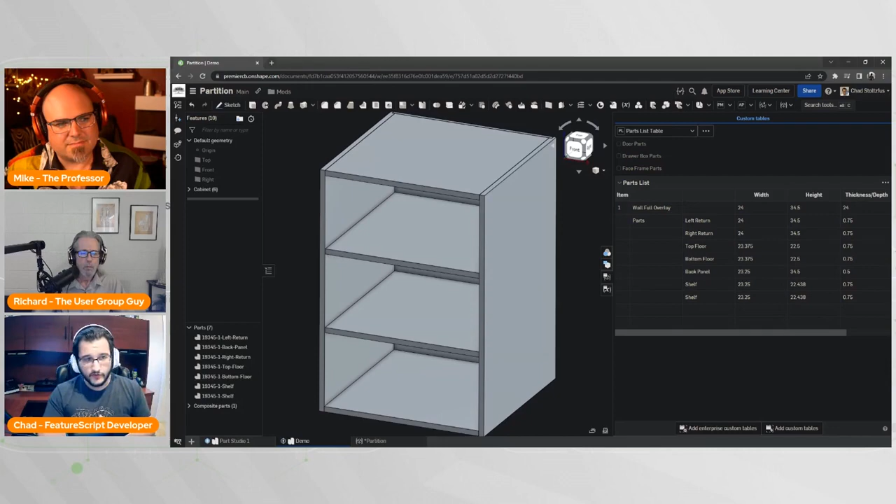So a way that we can demonstrate this is by looking at one of our cabinets. Just a very basic cabinet specification that we have here. But as a cabinet maker, I might look at that and say, hey, I want to put a partition in here. Now, a couple of things you can see we've already done is there's a custom table over on the right side. All of these parts, as you're modeling them, are being measured in real time.

So if I do something like a move face, you can see that the return is changing in thickness as I'm editing it in real time. So that's one of the things that we do. We have this entire system existing in the background, all built with FeatureScript, that is measuring these parts. There's metadata associated with these parts.

If I go in here and I decide that I want to do, let's say, a split, I'll split this part with, let's just say, a mate connector. You can see that it says now there are 2 top floors in this cabinet. Really great. One of the things that does is that eliminates a couple of opportunities for human error, right?

If you have 1 floor and you turn it into 2, well, now I don't have to remember to go back to my paperwork and list another floor. That's just done automatically. So that whole process of quantity, keeping track of what sizes things are, we don't have to type that out manually anymore. That is recorded the moment that you make your model.

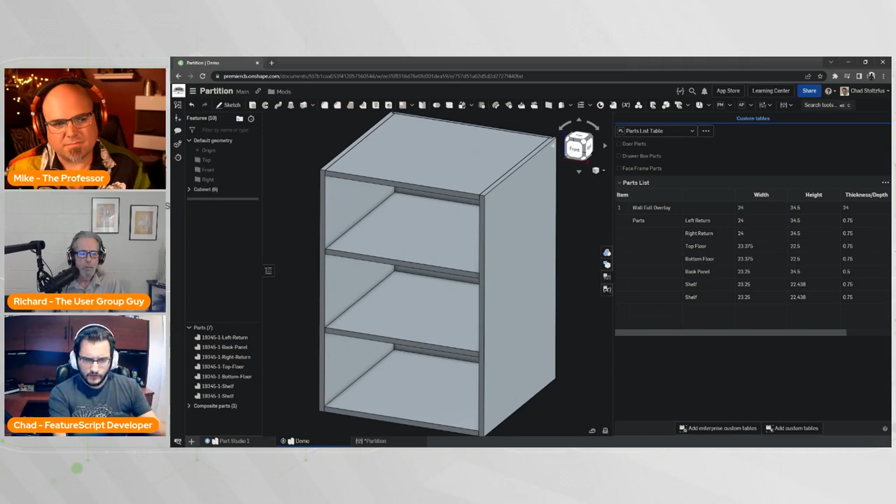Now, when we get into modifying this cabinet, as a cabinet maker, I look at this and I say, I want to put a partition in there. Well, it's as simple as going into the search tools and using the partition custom feature.

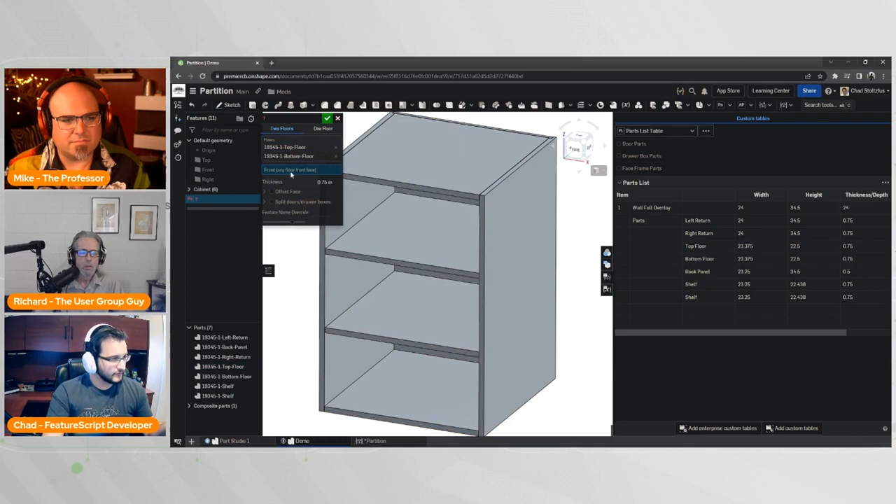And so here we're looking at very familiar terminology for Premier Custom Built, floors, thickness. Do I have 1 floor? Do I have 2 floors? In this case, I have 2 floors. So I can select those 2 floors and select the front of one of those floors. That's going to tell me what to offset the front of my partition from.

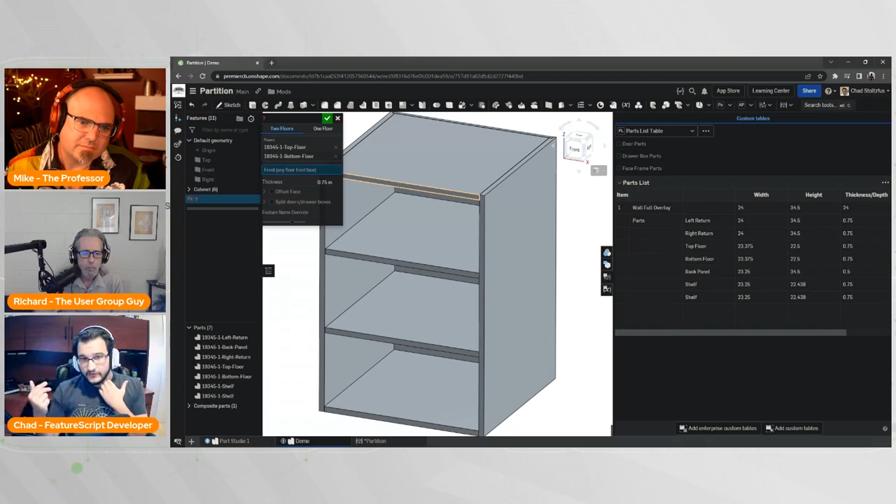But before I do that, as I add in this partition, pay close attention to the custom table on the right side, because what happens when you put a partition in a cabinet is it's going to split those shelves. But not only is it going to split those shelves, it's also going to add an 1/8 of an inch clearance to all of those shelves. And so you can see it adds in the shelves.

I can also go in here, change the thickness. And as I change the thickness of the partition, you can see the shelves are going to change in their height, because we measure the length of the shelves in that direction. It's fine, but you can see that the shelves are changing as I change the thickness of the partition.

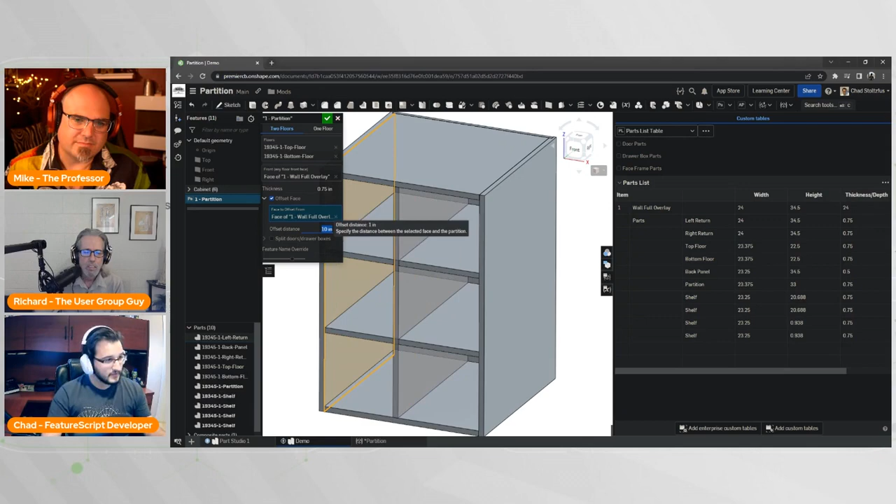If I decide to offset the partition from a particular side of the cabinet, you can see that the shelves' lengths update as the partition moves along. And finally, if I take a look at the partition itself, you can see that it adds that clearance to those shelves. So now what happens is, as I'm modeling a cabinet, I have to remember way less than what I had to remember before.

Because before, in a traditional 3D CAD system, I would have to know to add that 1/8 of an inch in there. But we're able to build the specification of our product directly into the tools that our project managers are using, which I think that's something that you just can't do with any 3D CAD system. I'd be surprised if there's another option out there like that.

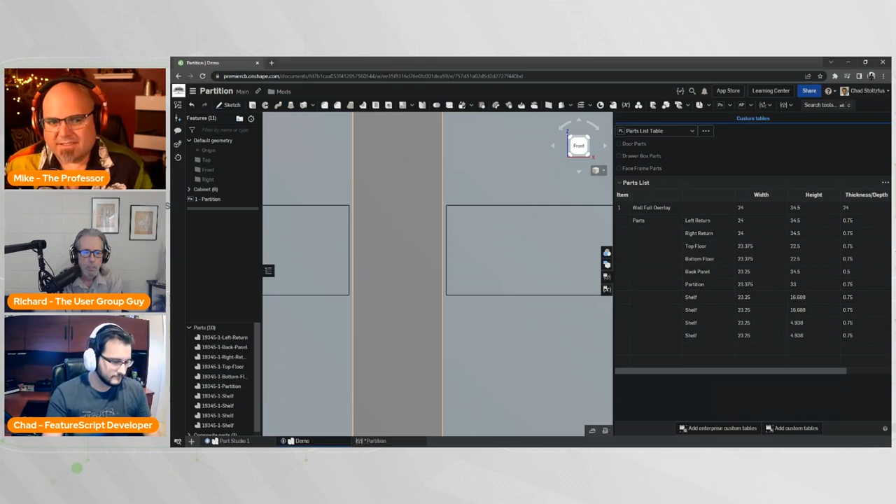This is incredible. Yeah, it's so amazing to see all the different tools that you've used to put this together. With the custom table here on the right side is a beautiful way of interacting and verifying what's going on, and it looks like you can even filter it with different aspects. It's really well done. I haven't seen this in a little while, so it's evolving based on how you discover what's available in Onshape. So it's amazing to see. I love it. Yep, great stuff.

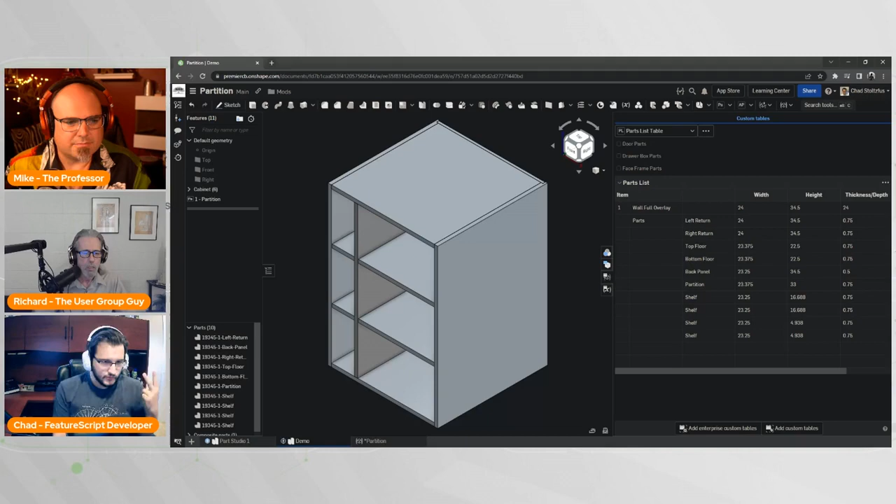But I would also say there's two kind of hidden ways of learning FeatureScript. The first would be to look at the standard library documentation itself. Like you said, Mike, it's actually open source, so you can look and see all of the code used to make the Onshape features you use today. So Onshape's extrude, that code is available. You can look at it and see how Onshape built the extrude feature, and take little aspects from that and maybe use it in a custom feature you're working on.

Additionally, if you go to public documents in Onshape, if there are feature scripts in there, you can find those either on Onshape's forums, or a couple are highlighted on Onshape's website as well. You can go through that code. It's all open source and under the MIT license, so you can copy the document, alter the code to fit a specific need, or copy little snippets here and there, and look at some best practices that Onshape users are using when making custom features. So those are definitely some of the resources that I used.

And always, I'm lurking on the forums. If you ever have questions, feel free to reach out.

That's much, yep, you stole my thunder there, Chad, I was just going to bring that up. Make sure you visit the Onshape forums, because there are a lot of folks like Chad and Evan Reese, just to name a couple, that are very, very helpful when it comes to learning just about anything, and especially FeatureScript with these folks.

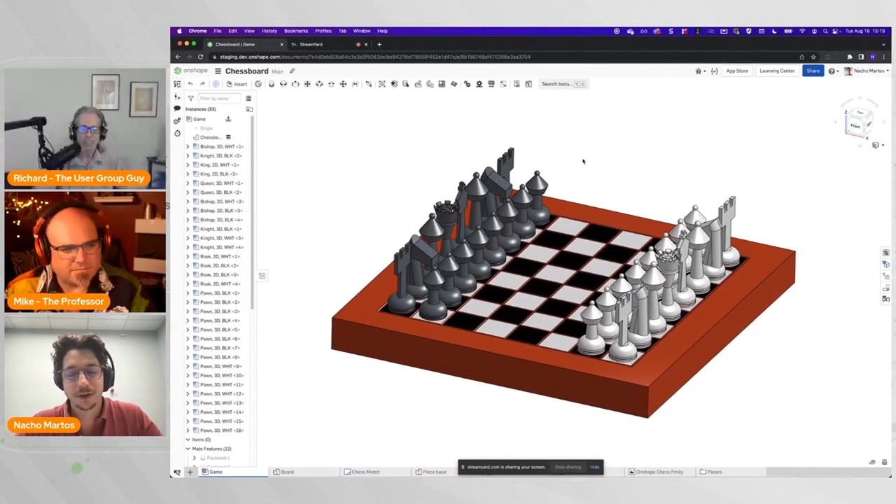So for today's demo, I'm going to use this chess set. If you did watch the What's New, you might have already gotten a peek at this. But I want to talk a little bit about how the new functionality really improves what branching and merging was doing, and how it gives it a lot more heft in the way that we actually run this operation. For those of you that might not be aware, Onshape has a branch and merge functionality very similar to what Git and GitHub have developed, in the way that we can generate versions and bring different pieces of design ideology together and work on them in parallel.

So it can be very useful when we're iterating and collaborating with people that might have different approaches to solving problems, or where we might want to do some testing aside from what we're immediately working with.

In the past state of the branch and merging function, you would select a parallel branch and merge it in, and Onshape would blindly make changes to your main workspace where you might be doing work. That was useful for many events, but often you'd find yourself thinking, hey, I just want a small part to come forward from that branch instead of the entire design across all tabs in my Onshape document, which can be quite hefty.

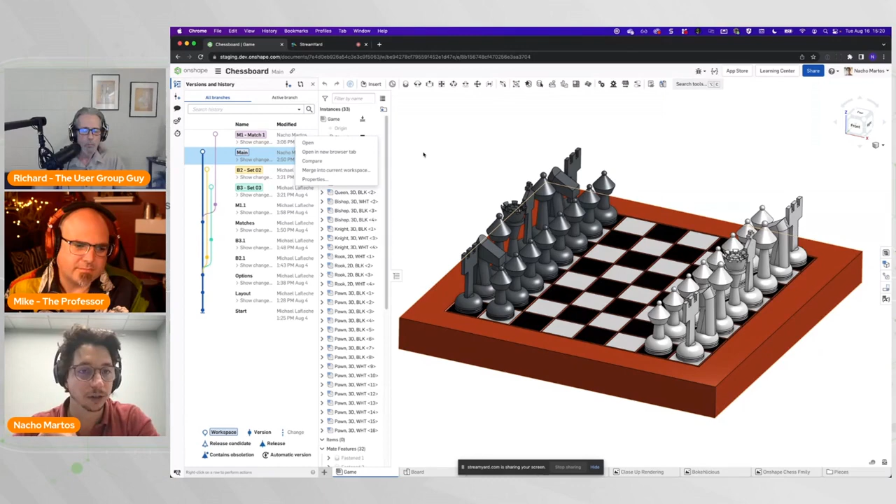So what we've developed here is a new merge panel. At a high level, this allows you to first define what type of strategy you want to be working with when making the merge.

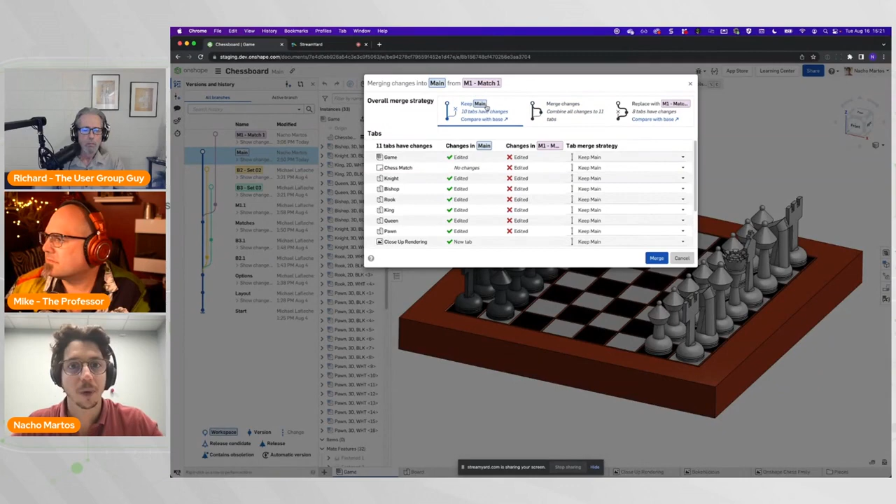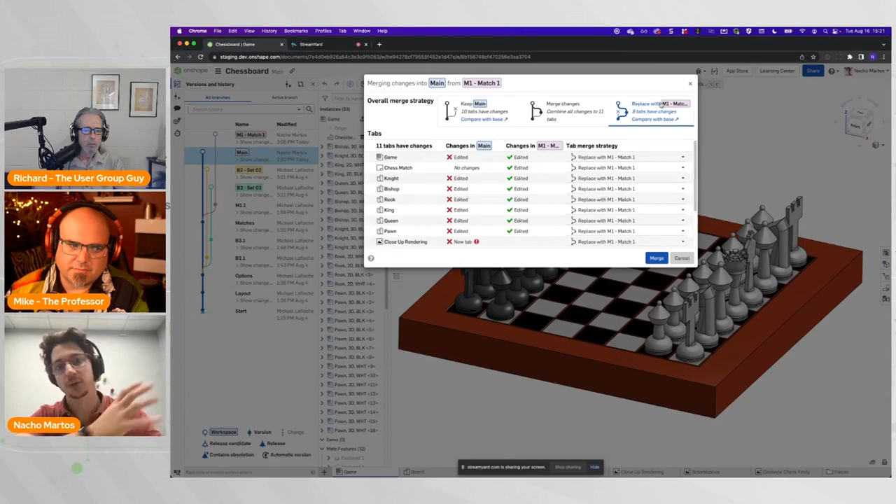And the last one is more aggressive, which takes all the changes from that branch and starts substituting stuff into your main branch, which is a bit more aggressive.

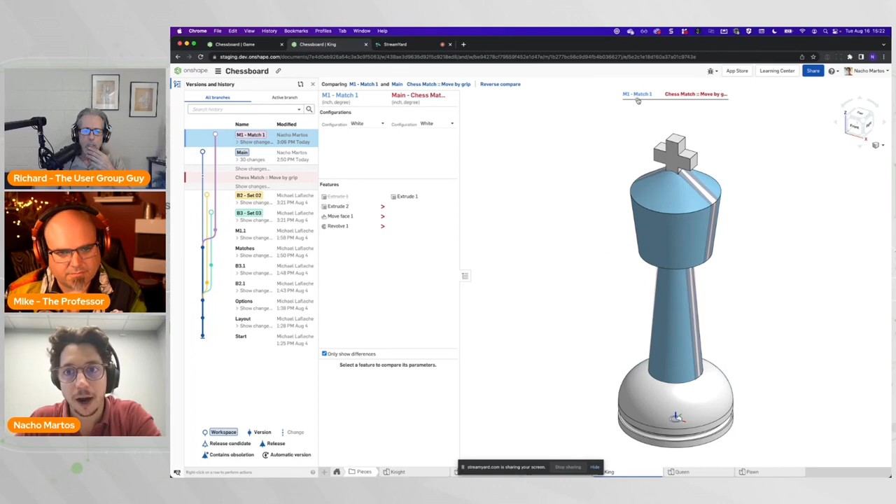What I really like about this tool is that we've added pieces of UI that help you contextualize what you're doing. For example, you can now compare directly to that branch you're thinking about merging with. You can open a new tab and say, hey, I want to compare how these changes are going to affect my design more pointedly.

So instead of having to do this as a secondary operation, you can now access this panel right from the merge tool, which can be very handy when you're trying to contextualize the change.

Once we've added context, we might want to define a slightly different strategy from any of the 3 that have been posed in front of us. So I might want an aggressive strategy, but not want to change everything. Maybe I'll keep my assembly the same, but substitute all of my pieces.

As I execute that merge, Onshape changes all of the piece part designs that I've told it to merge, but it's not changing my assembly.

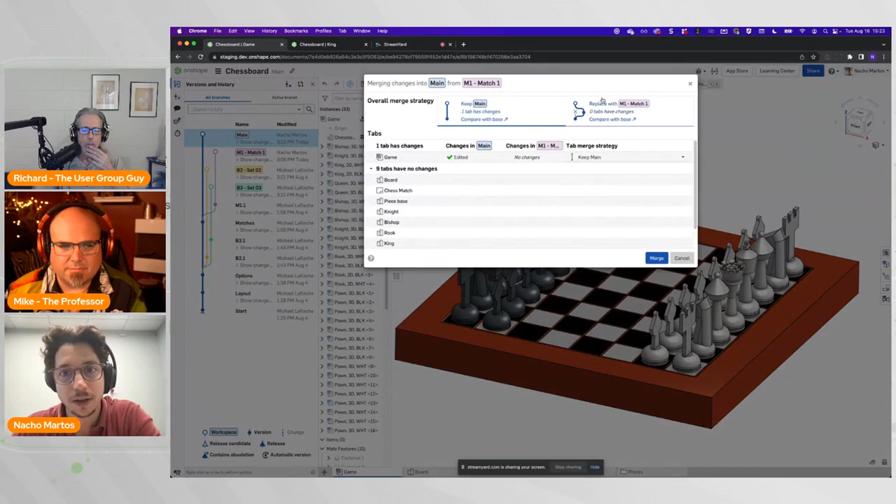If I wanted to execute a secondary change where only the assembly is changed, we can go ahead and make that as a second substitution. Then I need to go in here and replace this. There we go. Once you're more aggressive with the change, now you can bring forward that assembly.

What this fundamentally lets users do is really decide what they want to bring into their new working space and what to leave behind.

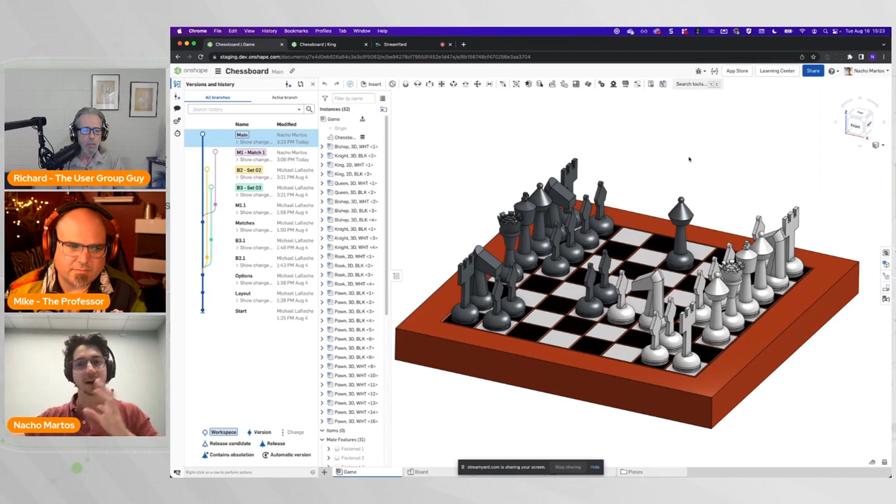So you fundamentally have a lot more power when using these branches and in the way you can use them to iterate. Before, if you were iterating in a branch and spent a lot of time really nailing something down and getting it perfect, you might run into the problem where someone else had been working in your main workspace, and the changes you want to bring in might not totally fit what has been happening there.

This allows you to do that way more selectively and really empowers you to leverage the branches in ways that were impossible before.

Well, that takes branching and merging from checkers to chess for sure, Nacho. This is a very powerful way of dealing with the data and removes a lot of the roadblocks.

Yeah, and the new methodology there is great because I've seen the comments in the forums. In fact, I think I saw one just the other day where somebody said that merging sometimes scared them, because they weren't exactly 100% sure what was going to happen. Now with the selective merge, he's not afraid anymore.

So that's fantastic. Michael, we've got something else you're going to talk about here too. I wouldn't say it's unique to Onshape, but I bet you can tell us why Onshape makes it better. It's certainly unique the way we did it. But thanks again, Nacho, I'll put you back in the green room.

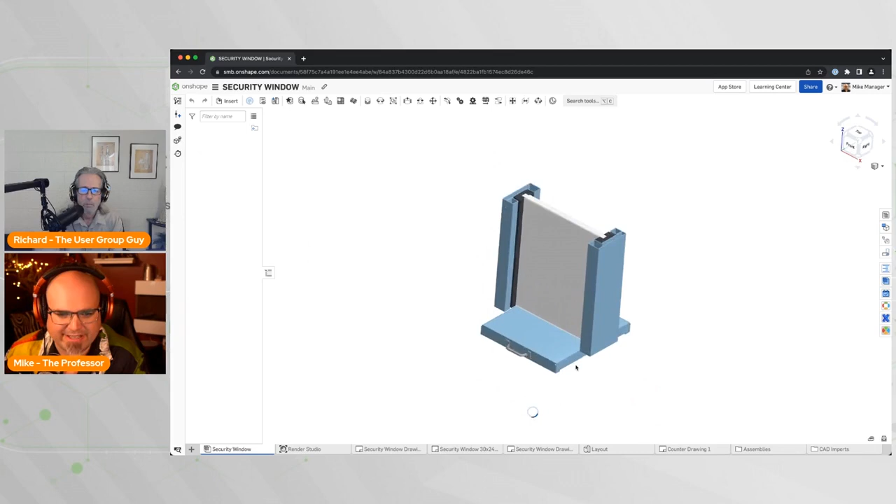All right, so I'm just going to go down here. I have the security window, and in fact we'll go to the assembly. So a pretty basic kind of security window that you'd find at a, well, maybe not a bank - this would be kind of a bank in a bad neighborhood perhaps. But, you know, it's a security window, right? And there are different options you might have for dealing with that security window.

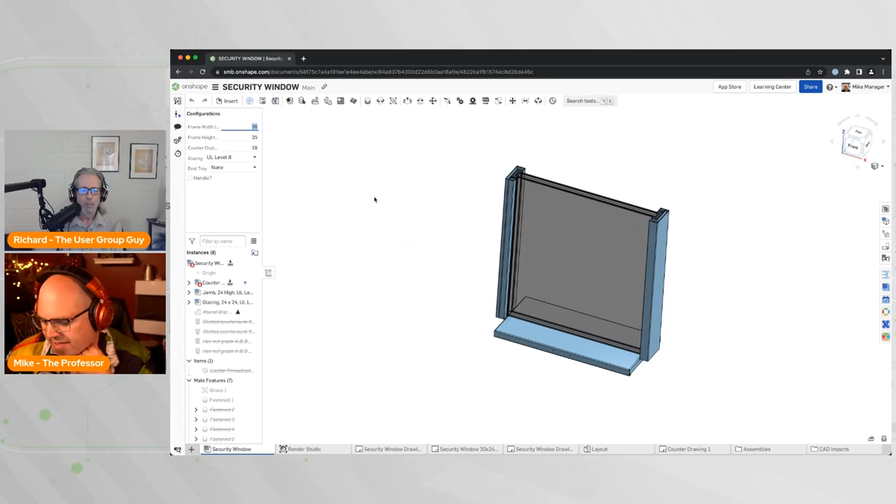Now, of course, when I buy a frame, I might have a 25-inch by 35-inch by 24-inch counter depth. And you're seeing it's changing very quickly.

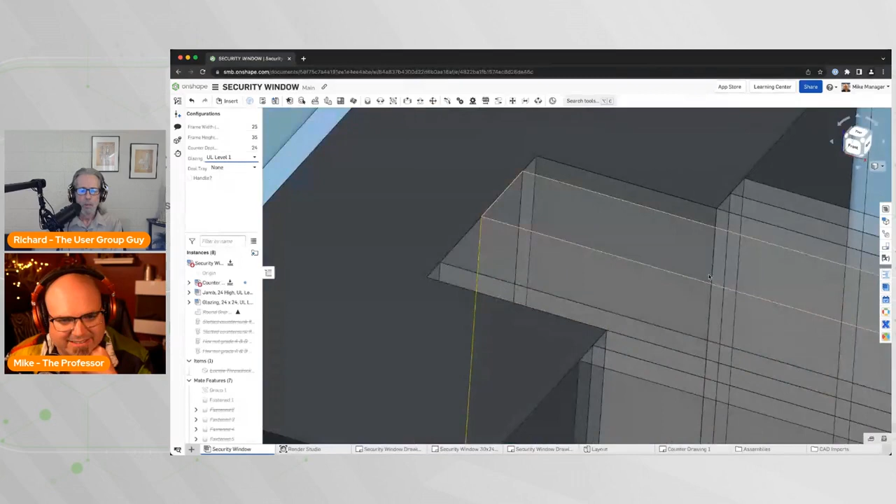And you see I have this really nice set of glazing here for the glass. Here's UL level 1 glass, and we'll let that update, and there it is. It's a little thinner, but if we go up to level 8, it's much thicker, right? So it's much more impenetrable to attack or whatever might be happening here that this window is protecting against.

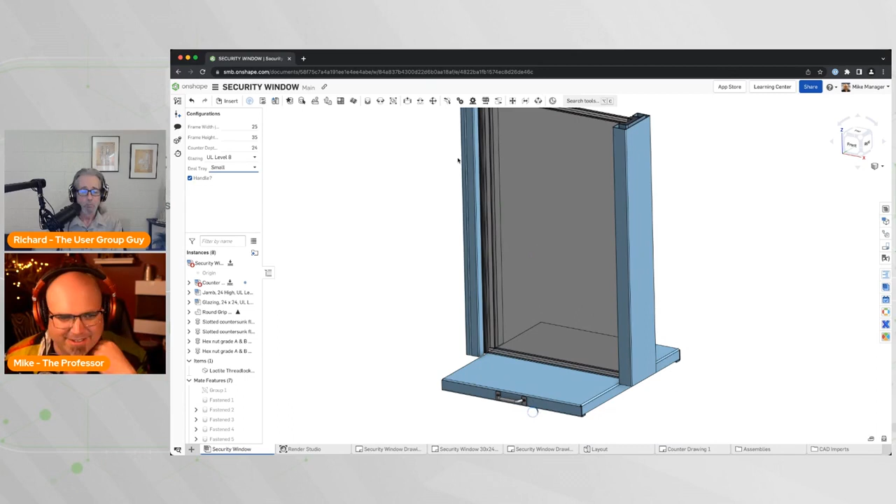Do we want a handle or not? Do we need a deal tray to pass the winnings through, right? If you're at the cashier at the casino, right? You need to get... I'm there collecting my winnings all the time.

Exactly, every day. So, how did we get to this point? This only took me an hour to build this whole thing with the interface and the assembly. Why is it that easy?

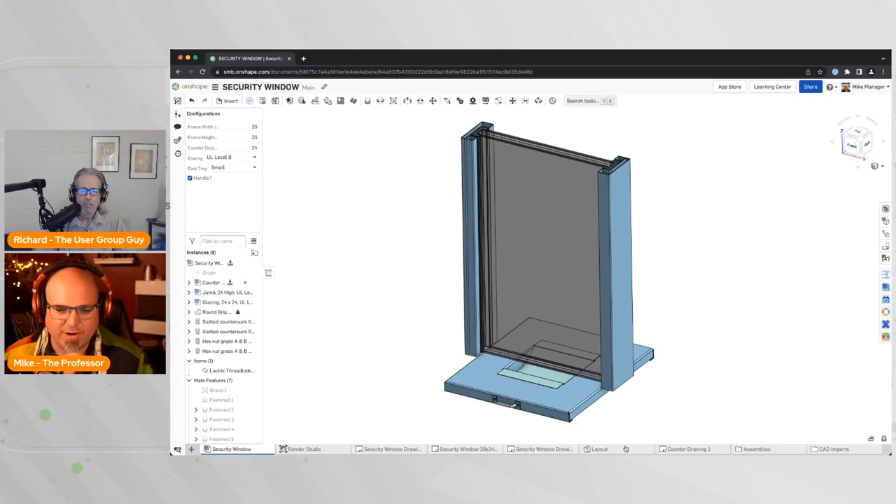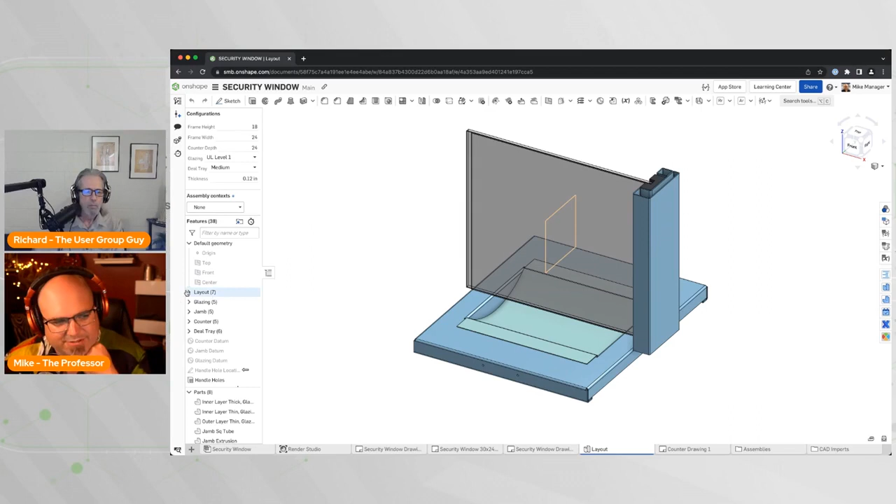Well, here's a part studio. It's something called configurations is what we're doing. Lots of CAD systems have configurations or parameters or design tables, whatever it might be. But this is the part studio in which I designed all of the pieces of the security window. Look at the feature list, 38 features - most, there's like 4 that aren't even real because it's like these right here.

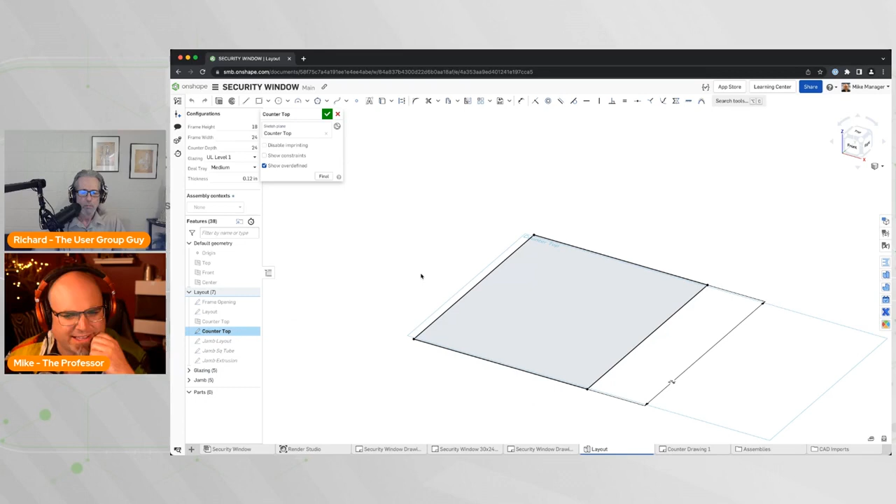And it's one sketch - well, not just one, several sketches. We have a sketch for the basic size, a sketch for the inner kind of layout where we're going to part out some things, another sketch for the top of the counter and things like that. Very basic, this is very elementary, kind of. And all happening in one part studio. That's the key.

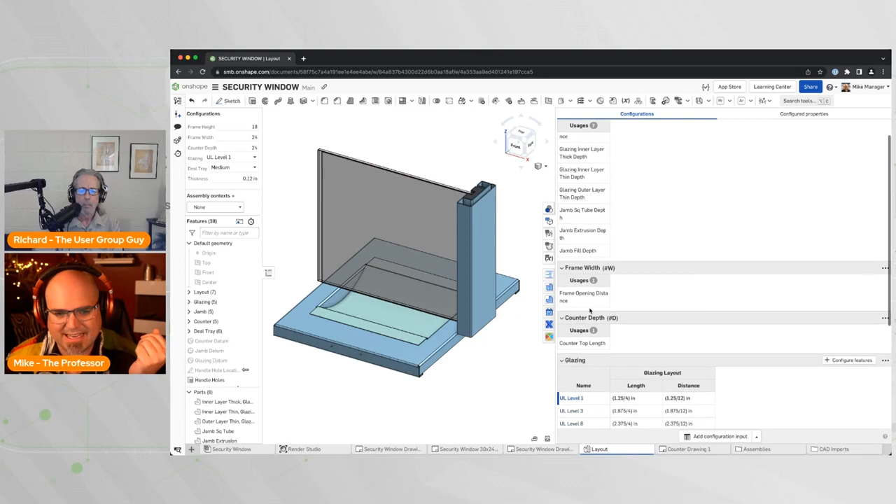So the reason why that's the key is because here's our configuration manager over here on the side. And instead of having to go to Excel or do one kind of set of parameters at a time, like in other CAD systems - you could do the things I was doing a little bit, not all of it, but you could with additional extensions and things you buy third party - here in one sketch, I'm able to take that parameter, that variable for height, and attach it to all these different dimensions. Same thing with the width, depth. And these are, I can edit the definition of that.

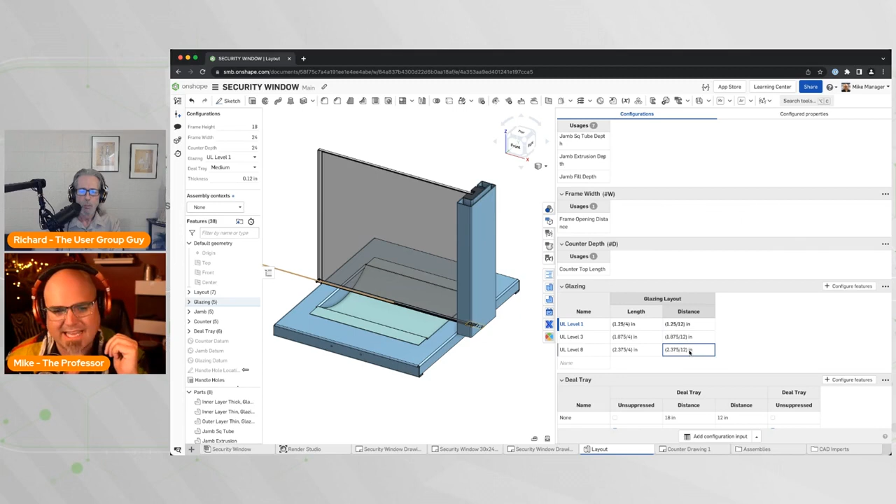You can see it actually has a default value, minimum and maximum as well, so you can have integer values that are acceptable. For the glazing, remember UL level 1, here's the different calculations taking place to get that level of thickness of glass. If we have a deal tray, we need to suppress and unsuppress this big cutout here with this flap of sheet metal. By the way, all the sheet metal works, right? As it should, yeah, as it should.

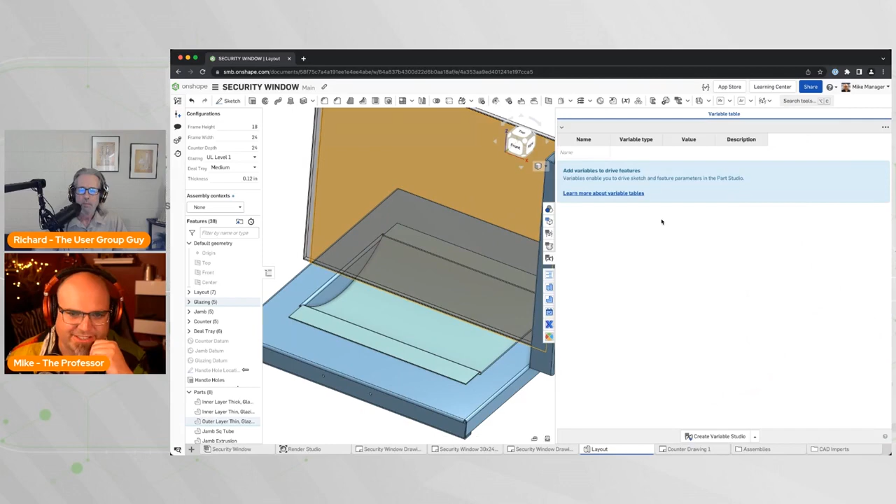I get all my variables - actually, the variables are already there, I don't need them there. And finally, the thickness - I can control the gauge thickness of the sheet metal in one go here as well. And that's all in one part studio.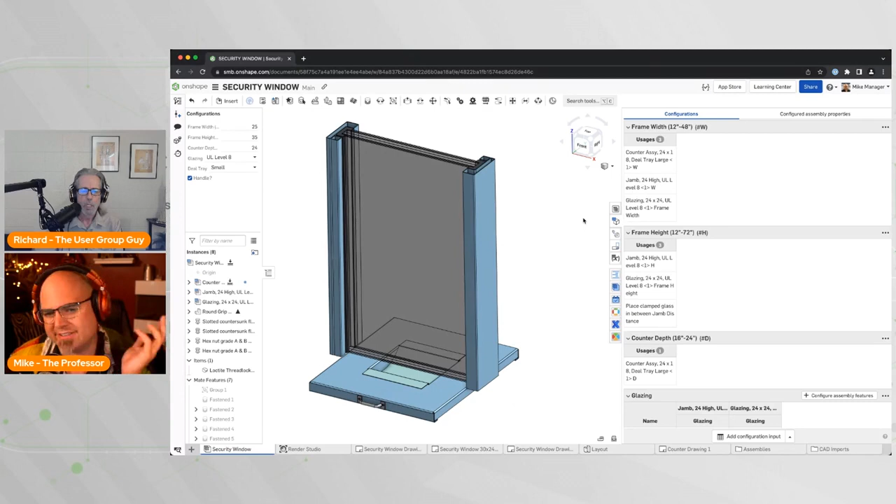Yep, and then I put it together in the assembly. And in the assembly, that's where you can go in and change which part goes with what based on which value, essentially. So that's the next step. And from that, you're able to make drawings and exploded views, right? So you can see, here's the mapping, essentially, of how to make these map to one another.

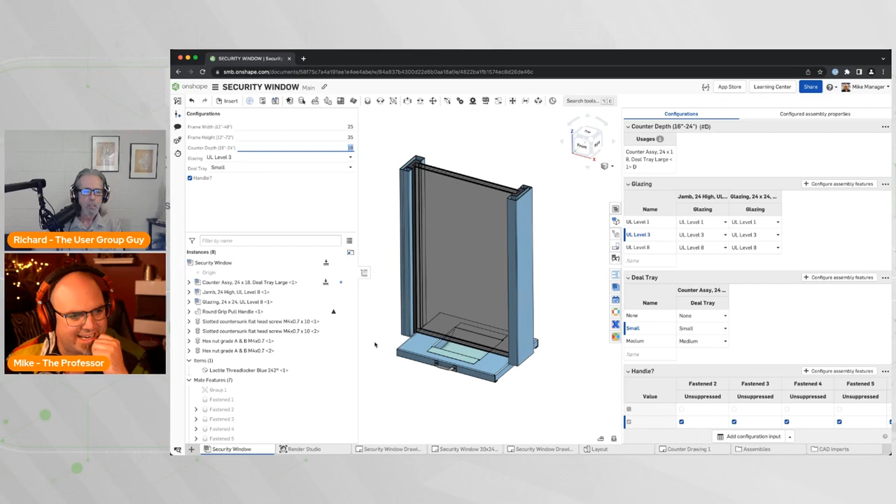And look, it's even smart enough to change the part number. So if I change this to UL level 3 glass, and it's 30 - well, 30 is not available, right? 16 to 24, so I'll say 18. We're getting the right names for parts as we're going through this.

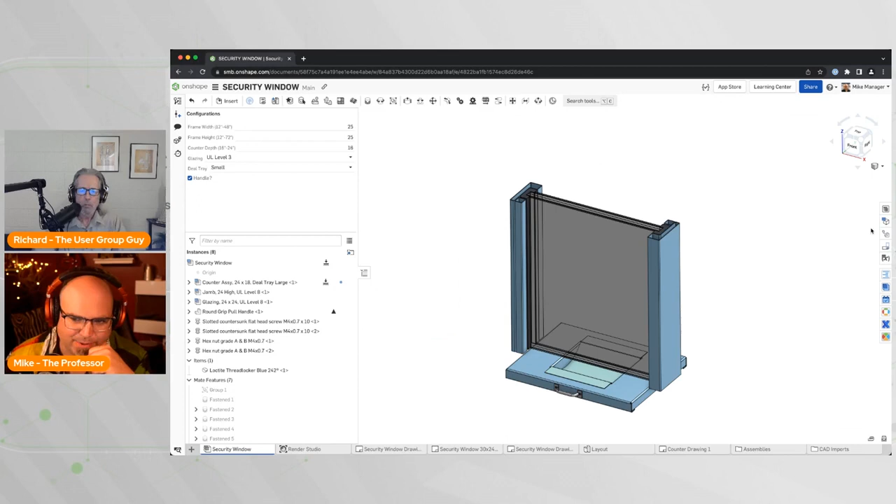Hopefully, if I've set that correctly, the names of the parts in the BOM might show it a little better, but each of these names can be set as you work through this. Finally, the exploded views that go into this—here's one set of exploded views for assembling the handle in place—and all those will still work if you change the configuration.

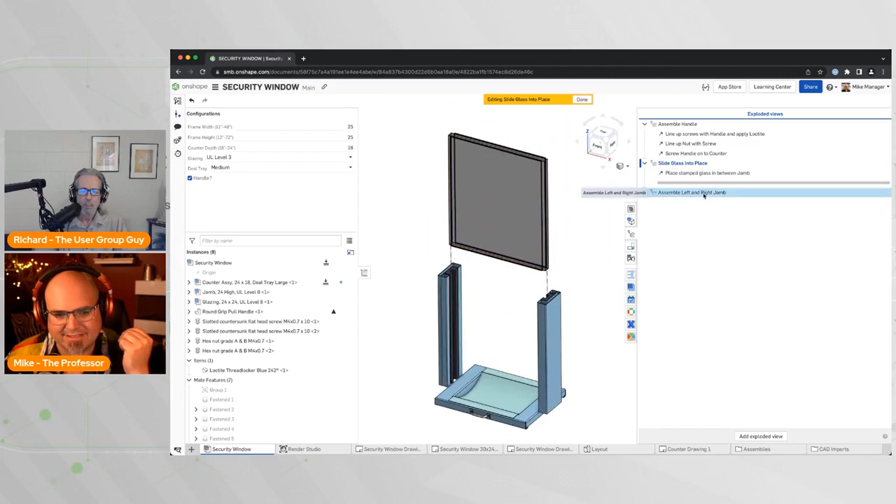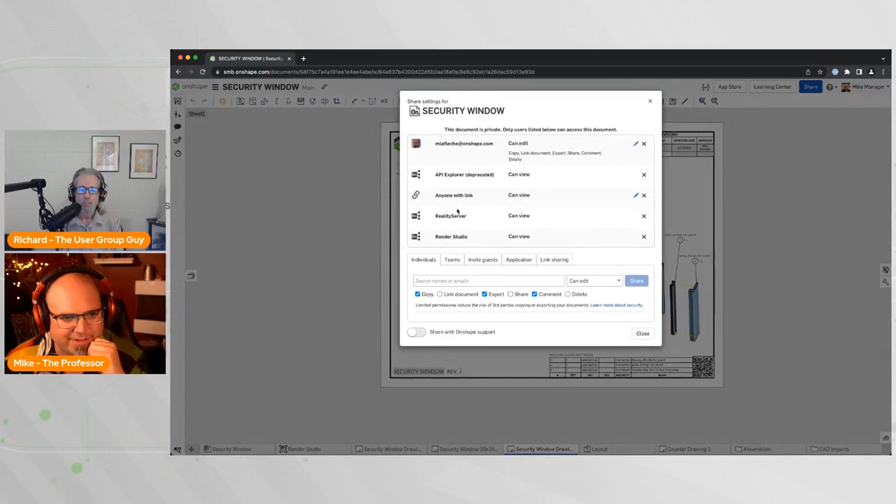Of course, you can make detailed drawings of each set of configurations and QR codes. So I dare you to QR code this and see what happens if you're watching the show. Let me make sure this is public. Yep, anyone with the link can view. So go ahead, take a picture of that QR code and see what happens. Can your CAD system do that?

Outstanding. Configurations on steroids. I absolutely love it. Exactly. Let me stop that.

Did I stop the show? Right, yes you did. Yep, great, it looks good. You look great on screen there, buddy. Thank you, how do you like my shirt? I love your shirt. Yeah, I kind of went basic brown today. I don't know why I did that. Maybe it's because I haven't done laundry in a couple of weeks.

Anyway, we've got one more little piece of stuff to look at here, and it's something I think people think is pretty important. Let's talk about the cost to get going. You had to bring how that works. Well, yeah, I don't like to talk about money, but sometimes we have to.

Let me preface this by saying I'm going to give a really brief overview of what you can find in this ebook, Sticker Shock: The Invisible Costs of CAD, and we'll throw that up on the screen. You can copy that URL, and we'll also put it into the show notes. So I went through the guide and pulled out some of the pertinent information. Let me pop over to where I'm supposed to be here. So let's take a look at this.

So the first thing you're going to think about when starting with a CAD system—maybe you've got a business starting up, or you want to be a YouTube star and use CAD to create things and sell things and talk about things—the first thing you're going to need to look at is some equipment.

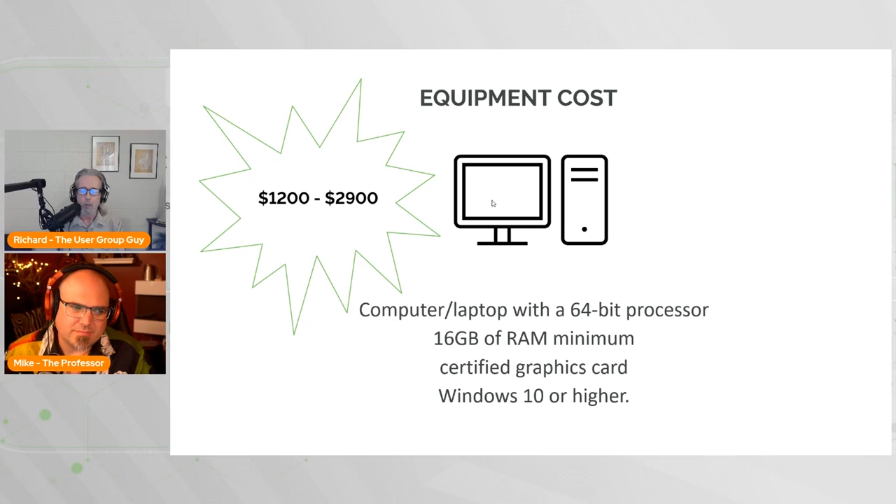So let's take a look. I actually priced out some of these things, went to a couple of the top computer manufacturers' websites. All of them have a little configurator, so I plugged in these minimums, and what I came up with was a range of about $1,200 to $2,900. Now that's the minimum requirements, and I suspect that most people trying to run a powerful CAD system are going to want something a little bit more than that.

So you're looking at over $3,000 just to get started. Now, if you're going to run PDM, if you've got a big company—and we'll assume at this point that you are, and talk about individual usage later—if you're going to run product data management, you're going to need a server to run that. It's a separate program, and you're going to have to spend some money on that. We looked around, and those server prices are pretty high: we're talking about $8,000 each.

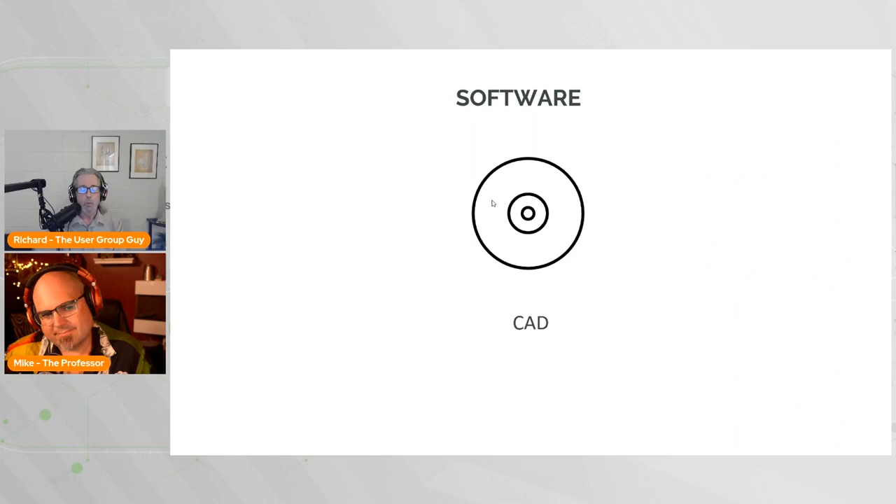Now we've got our equipment in place, we're ready to go. Now we have to buy our software—our CAD, right? That's the first thing, so we're looking at about $4,000 for that. But that doesn't include the maintenance fee, which you'll pay that first year, and continue to pay every year as long as you're using that software. As long as you want the benefits of upgrades and support, you're going to have to keep paying that fee every year.

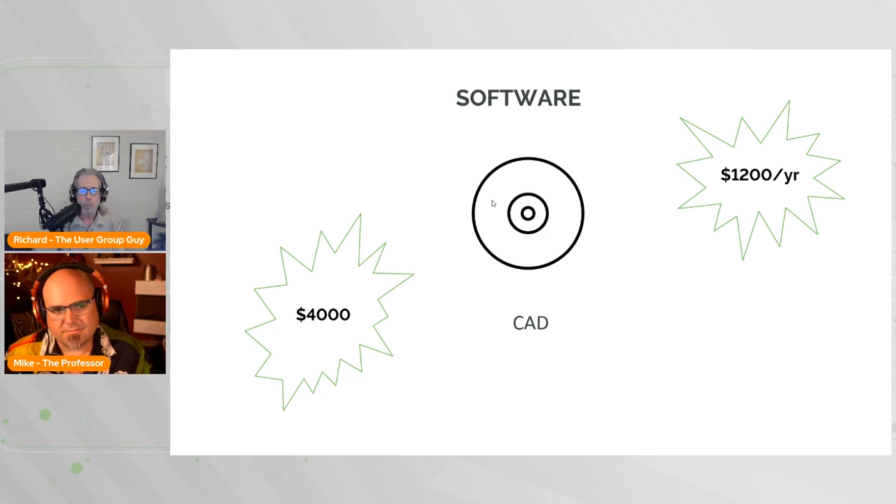In addition, you're going to need some more software. If you're going to run PDM, you're going to have to buy that PDM software, so you're looking at another $1,900 or so, depending on your version. If you have more users than licenses and want floating licenses, you have to pay a floating license fee, anywhere from $2,000 to $4,000. Then you need server software for your PDM, things like Microsoft SQL, so you're looking at another $8,000. We're looking at a lot of money just to get started, and that can be pretty daunting.

It also doesn't include some of the hidden costs that come with file-based CAD. It crashes. It just happens. It's happened to me, it's happened to you, probably happened to just about everybody. It crashes more for some people and less for others, but all file-based CAD will crash eventually. Sometimes the result of that crash can also be data corruption, so your files can become corrupted. You can spend time recreating those files, or send them to your support representative, and maybe they can fix them, but you'll probably wait a couple of days. So you've lost some time there.

And then there's the extra work that comes with installation. You have to worry about upgrades every year, downloading big upgrade files and pushing them out to your entire company. Hardware maintenance gets to be an issue as well — I mentioned graphics cards earlier, they fall out of favor with some CAD software and have to be replaced. So there are a lot of hidden costs I can't put a dollar figure on, but you know they're there.

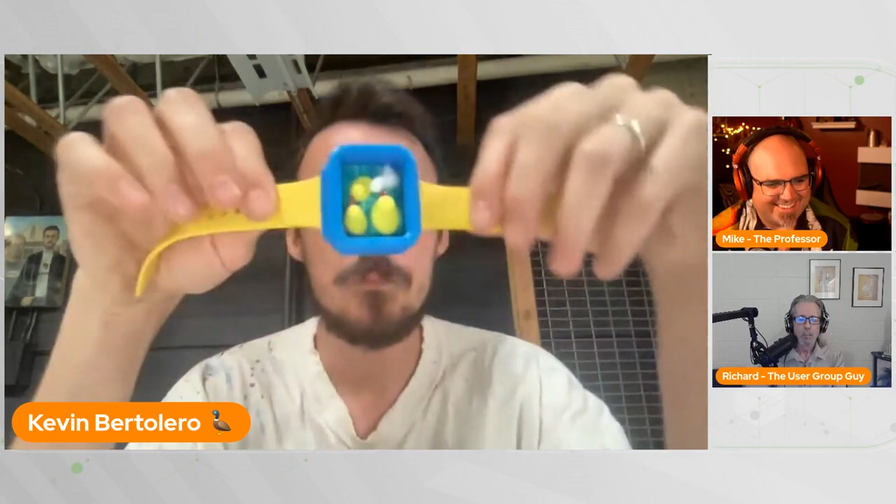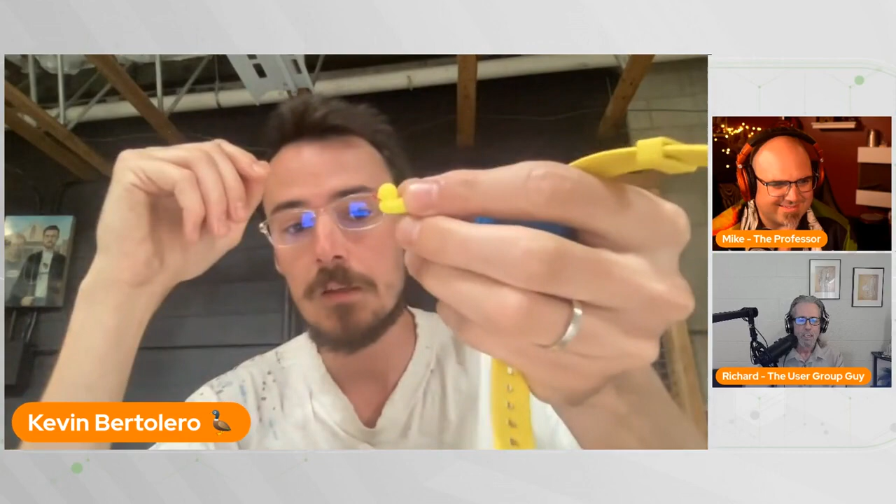Yeah, it kind of reminds me of the sand rake Zen garden kind of thing. Yeah, on your wrist, you don't have to carry around a box with sand and rocks and rakes and stuff. So I'm wearing one just for people to check out. I don't know, that's beautiful. This is like the latest iteration, if you will. So it's a pool, and you've got some magnetic little duckies in there. There's a little duck right there. He's pretty cute. That just blew me away, I did not know they were removable. Okay, that's awesome, yeah, so that's awesome right there.

A huge part of the vision is pairing people who want to restructure or reshape their relationship with time because maybe, like me, they're tired of being whipped by the clock and just want a different association with time. A lot of people have this habit of looking at their wrist and then being anxious, so instead of looking at your wrist and being anxious, you look at your wrist and you see this thing.

And then I'm also borrowing from the kind of fidget idea. I don't know if you guys are in touch with the whole fidget spinners and those pop bubbles, or people rubbing stones, which were popular when I was younger. People love something tactile to ease their mental anxieties, or just love using their hands and stimulating themselves. Some people call it stimming or fidgeting. But the idea is it's a fidgety thing, so you can clack the ducks in there or put them other places.

But then it's also social. So like if somebody else has ducks that you like and you have ducks that they like, you can do a little swap. The idea is to build a community around it, and you can also just make charms that match your individual personality.